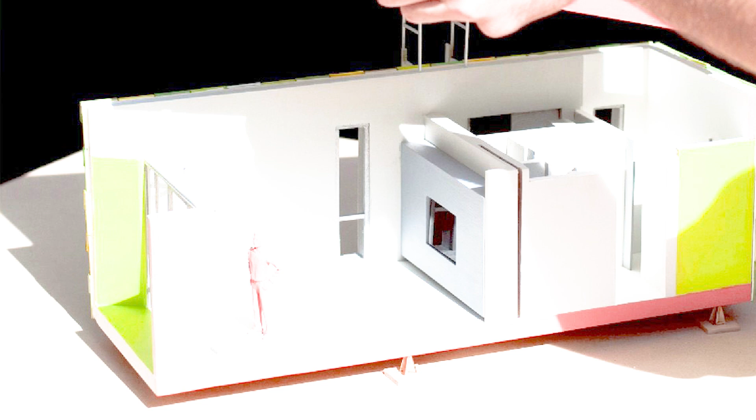Okay, let's make a start while the next slide is loading.

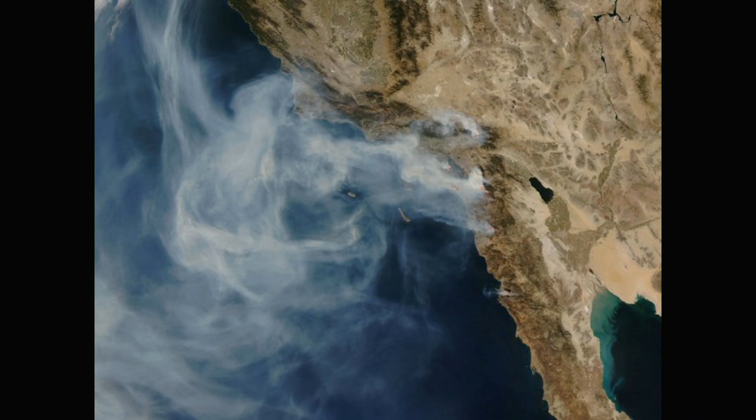And we also asked, since the project is located in Southern California, what are some of the key attributes that characterize the city? Horizontality, grid formations and topographical change, variable densities, microclimates, cultural multiplicity, and alternate living scenarios or dwelling scenarios are things that we looked at. One of the mandates of the competition is to design a prototypical house for the region and climate and environment that your university is located in. So if your university was in Indiana, you would be designing for that environment, that climatic zone.

The year we participated was unique because the site wasn't in Washington, D.C., which is where it had been in previous years. It was in Orange County, and of the 20 schools that were participating, we were the closest one. There was a school from Austria, there was a school from the Czech Republic, and although it's a challenging competition, I have to say their challenge was greater because they had to have the house in a shipping container on a ship to the U.S. while we were still building the first prototype on campus. So hats off to them, and both of those teams, I have to say, did a really terrific job.

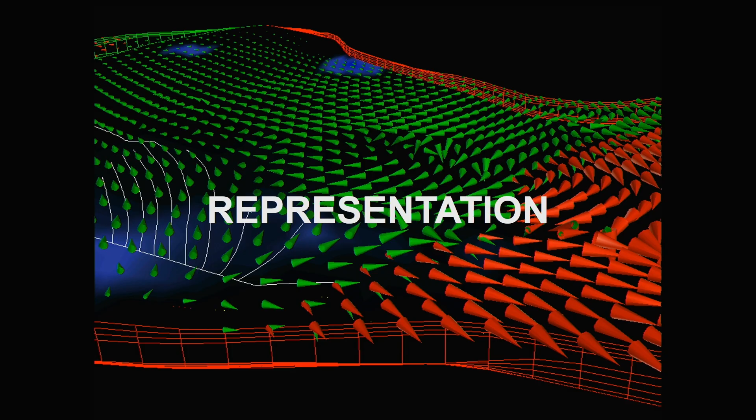Mapping things that were changing. So again, like the satellite photos that I showed earlier, part of our research involves trying to see unseen or immaterial phenomena and forces, particularly as it pertains to the changing state of things like air, light, space, fluids, etc. So fluid dynamics, mixing and remixing, vector fields and flow patterns, fluid dynamics and vectors that describe forces, turbulent flow visualization, in this case smoke and wind, diagram of estimated energy flows, and a map describing another site,

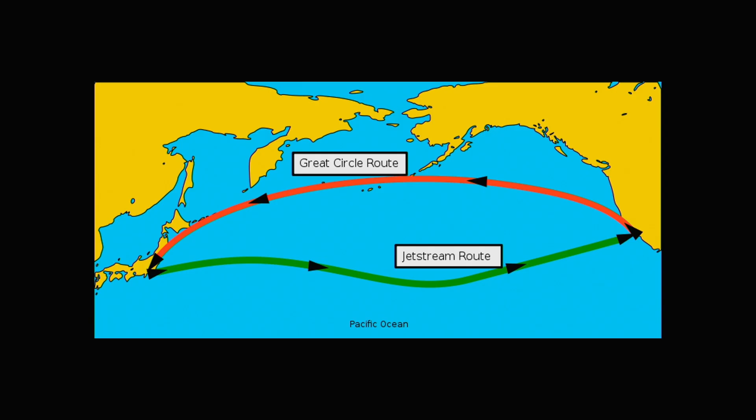the Pacific Rim, which more specifically shows two different flight paths. You'll note that they are different, one taking advantage of the geographical distance, while the other uses the path of the jet stream or tailwinds to map a route.

We became interested in our inquiry in subtraction. That must surprise some of the USC students, huh? And things, porosity, or stuff with holes. So we looked at natural organisms and inorganic objects to understand how they work or perform. This is a sea sponge, a plan of an automobile intake manifold,

two untitled sculptures by Tom Friedman, one on the left additive, with kind of equivalent amount of figure and void space, and the other subtractive and entropic, a school chair that he took and drilled holes into to the point of near collapsing. And finally, a land art sculpture by the artist Michael Heizer, which is a continuous frame of reference for work that

I'm involved with, Double Negative, and two images, one the aerial showing the first negative, which is the natural gorge at Mormon Mesa, and then the second negative, which you see depicted from the point of view that spans the gorge, which is a line that he created through dynamiting and bulldozing the earth to create a line that spans the gorge that is the length of the Empire State Building.

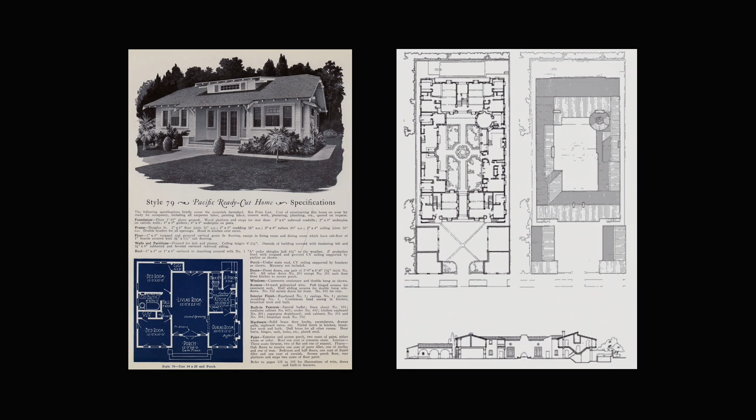Architectural precedents included vernacular housing typologies in Southern California, such as craftsman bungalows and courtyard housing. In both instances, we saw an organization of rooms or zones arranged around a central social space that can be used in different ways. In the bungalow, depicted here on the left, we learned about the value of porches as shading devices and intermediate spaces or gray zones between interior and exterior spaces.

USC professor Ralph Knowles's research on solar envelopes and form finding, where he started with simple primitives and then faceted, beveled, chamfered them in a manner that responds to the movement of the sun. And then another example that we see in Japan with their solar codes.

And one of the reasons why so many buildings in Tokyo have these unique chamfers or bevels at the top, which are not aesthetic conceits, but rather driven by code requirements for how many hours of available sunlight you're stipulated to make sure your neighbor receives. So the form, which is a determinant of massing, is driven by performance, hence the title, Performance in Form.

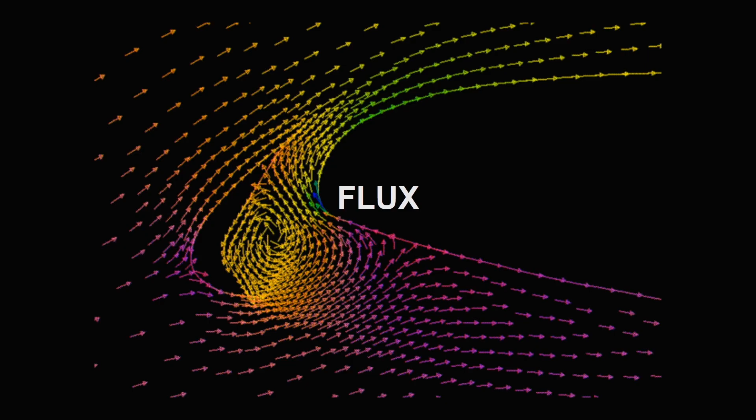The second pedagogical principle that became our mantra is that architecture is a mode of critical spatial inquiry and practice. And this slide just illustrates some spatial concepts of the double negative and how volumes could be nested, tunneled, intersecting with one another, almost like a manifold, an idea that we would return to in the design process, in the conceptual design phase.

So our research and observations led to a spatial concept that celebrates the various forms of change that are such a vital part of our culture, which led to the following statement. Our world is changing fast. Change, in fact, is ubiquitous in our contemporary experience. The different changes, climate, social, technological, cultural, and change more specifically to California and Southern California in the formation of the nuclear family are prevalent.

So we were trying to look at alternate living scenarios that reflected contemporary lifestyles, but also as part of a global condition which you see, I know in Tokyo for sure, but other cities that define life in the 21st century. Some notes on process.

So we used this research as a point of departure, beginning with a simple yet efficient primitive or mass that measures approximately 10 by 10 meters. And then subtracted portions from it to channel air and light into the house. Again, the idea that I just showed of porosity and flow is central to any passive energy design premise. So from the beginning, we wanted to make it a focus on the massing of the house and part of the performance criteria.

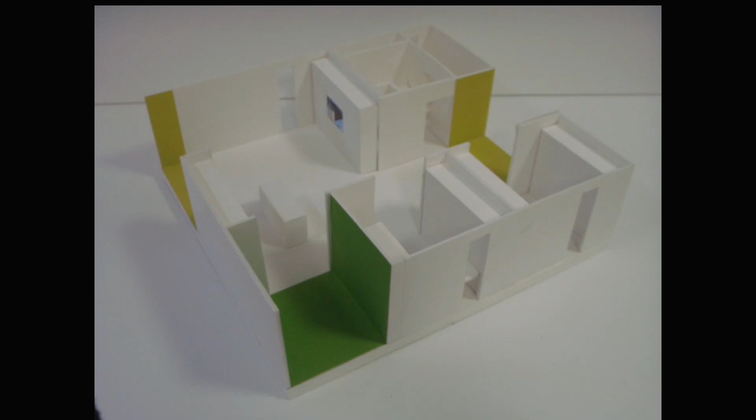Another model that's beginning to look at the relationship between interior and exterior zones. We're also starting to think about how we construct and transport this to Orange County. And so you have 3 linear modules that fit on flatbed trailers, which you'll see a bit later. Again, intersecting voids or double negatives, framing models to study the system of construction and prefabricated assembly.

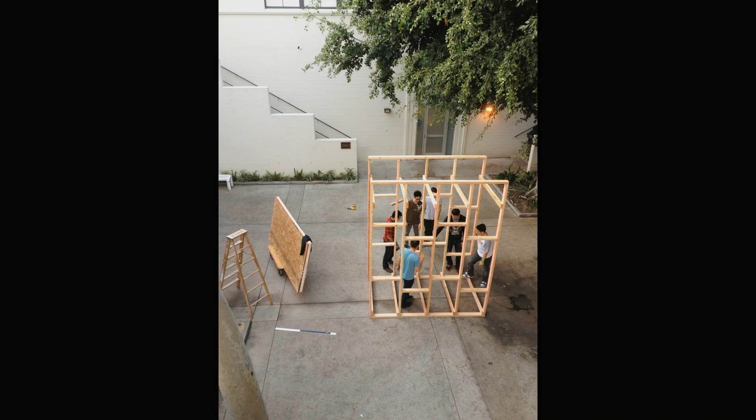So again, a reminder that we're constructing the house on campus and having to transport it to Orange County and reassemble it in 8 days. So issues such as how much each module weighs, how they come apart and go back together, are very important. Studies of perforated envelope systems, using various software to generate variable patterns. It's another more figurative pattern. Full-scale mock-up under construction in the USC courtyard.

And then design teams: we had probably anywhere from 20 to 30 students working on this. So we had different teams organized, so we were really in a kind of privileged position to explore visualization and modeling tools and do as much experimentation as we could afford to do.

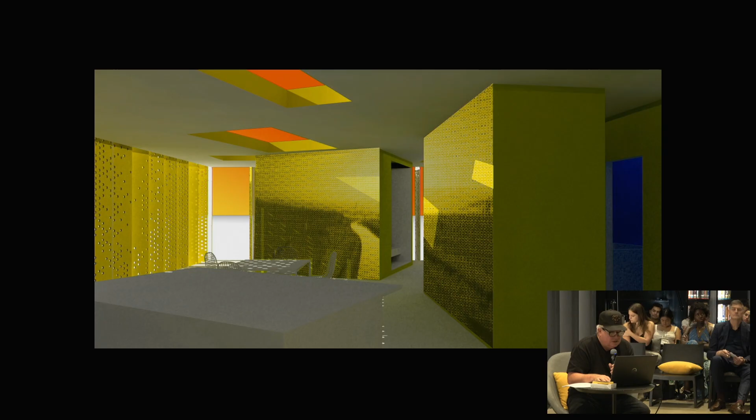So this is a prototype with the operable shutters that are perforated and respond to different solar orientation. Interior views, trying to model or show some of the effects. Studies involving the idea of chromatic space, so looking at tinted skylights. The shutter envelope system permits the homeowner to control the amount of privacy, breezes, and light. So instead of highly automated systems, we wanted to look at things that were lower tech and easy for users to control.

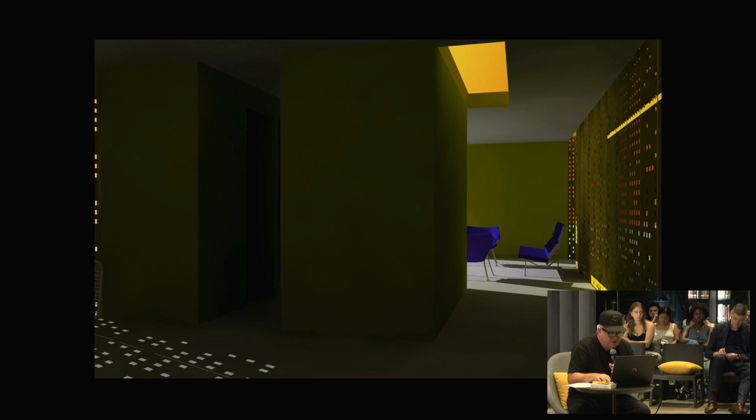Another view showing the relationship between interior surfaces and exterior envelope systems, pixelation, perforation. And we were using, this was a little while ago, software, Photoshop and Grasshopper, to generate some of the imagery and do the fabrication. Light and dark spaces. It's another alternate model, riffing off of Mies' 50 by 50 house. We did the 27 by 27 house, which I still like, even though we didn't go with that one.

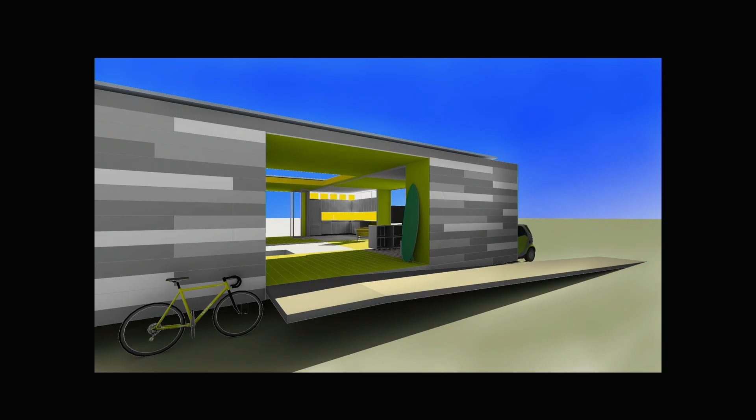Loft, inhabitable poche, including the service cores and storage walls flanking two sides. And then this idea of the house as a manifold, a more porous and open volume, in this case clad with reclaimed lumber. Louvers on the west-facing elevation, oversized openings to connect with the outdoors. Hopefully a critical take on the bungalow and courtyard house.

And then later, as we start thinking about it, even some of the case study houses, where we tried to put systems in place that didn't mediate as much between inside and outside, but allowed you to literally slide open doors that would allow the inside in, and also the solar chimney here for venting hot air and admitting light. We spent a lot of time on interiors, designing the project from the interior, looking at the courtyard or the flux space. Also indirect lighting mixed with natural lighting to produce atmospheres.

Yeah, so here's an example of indirect LED light sources. Tracking sunlight, various times a day, nighttime. So one of the contests that the Solar Decathlon had is that you had to show a movie at night.

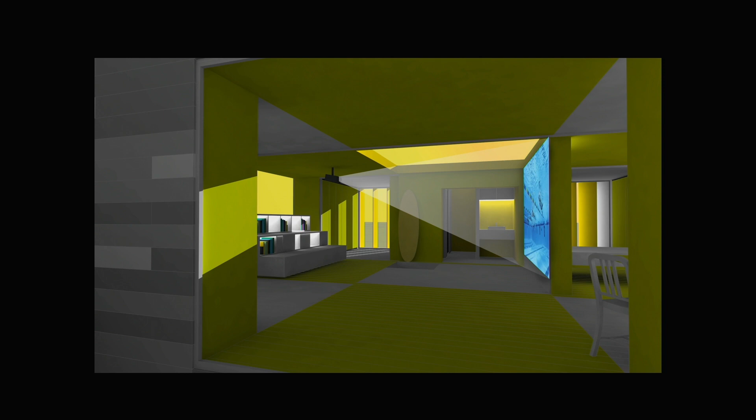I mean, so the competition, a large part of it has to do with how the house performs. So you have to operate the house, and you either gain points or lose points based on the performance. So having a home control system was an important part of one of the competitions. This is a simulation of movie night.

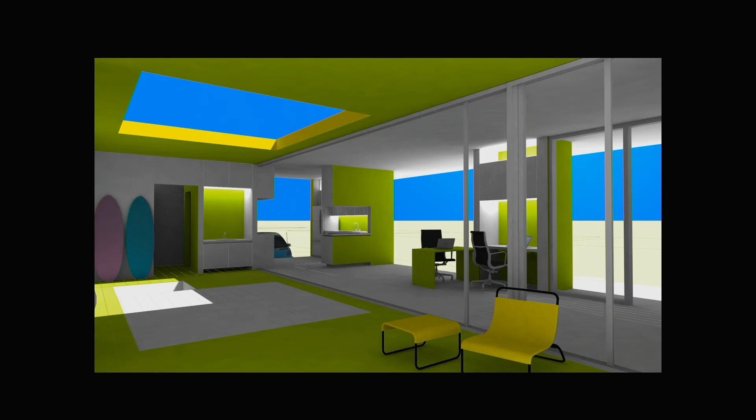This we're studying the placement of various sliding partitions, transparent and translucent, look at other ways of opening and closing spaces. Yeah, this is when I think we were starting to think some about the case study houses, and this is a kind of case study 2.0 project. The ramp is part, because the house has to be ADA accessible, so the ramp is part of an oversized landing and an extended porch space.

View of the PV array from above and three volumes, and then this roof that creates a carport. So those were some of the versions that we generated. However, at some point, you have to commit to an idea and start the process of developing the design and producing the construction documents.

And this, unfortunately, I don't have any shots of that, but we had, I think, in the final set, just in part because of the DOE requirements, over 100 sheets, which is crazy given the fact that some of the case study houses were built with 4 sheets or 6 sheets, the famous case study houses in Southern California.

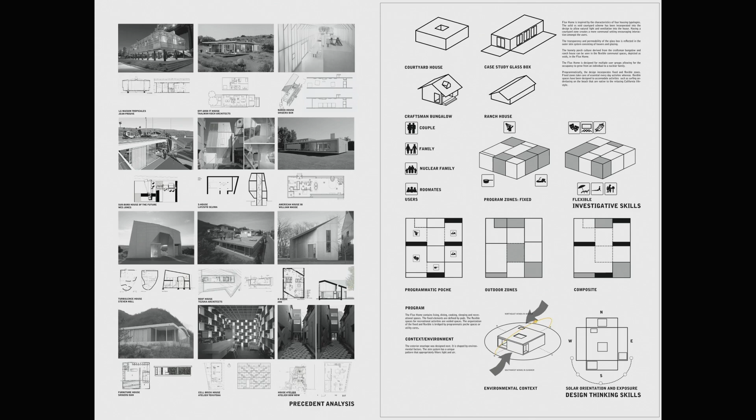So we're looking at a range of different precedents architecturally, diagramming the precedents and how it leads to our proposal, site plan and some generative and analytical diagrams, the whole issue of affordability, and so we were working with a cost estimator, and making decisions that are informed by a budget for sure.

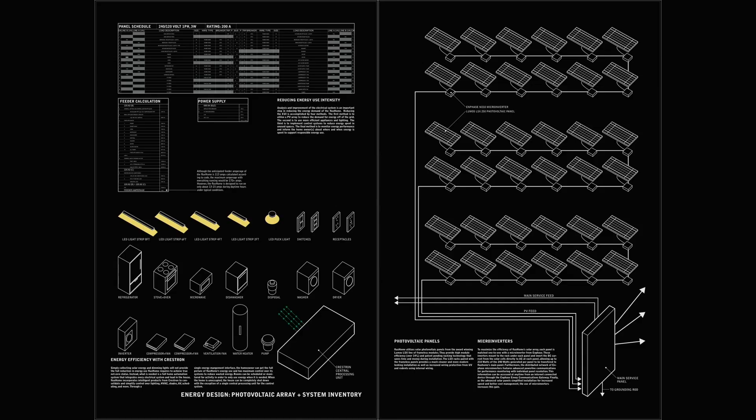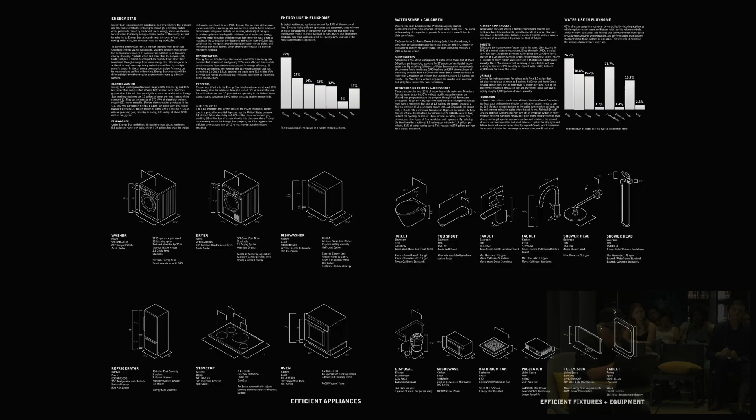Energy analysis, understanding our environmental context, research and design options for energy systems, natural and artificial lighting strategies, options for different mechanical systems, passive design strategies to try and achieve the net zero energy balance, energy efficient appliances and fixtures. So we had to quantify the usage of each appliance.

And now we're sort of honing in more on the design that's going to be built after going through some of those different criteria. We even had to operate a Facebook page, which we ended up with the most likes. That was one we won.

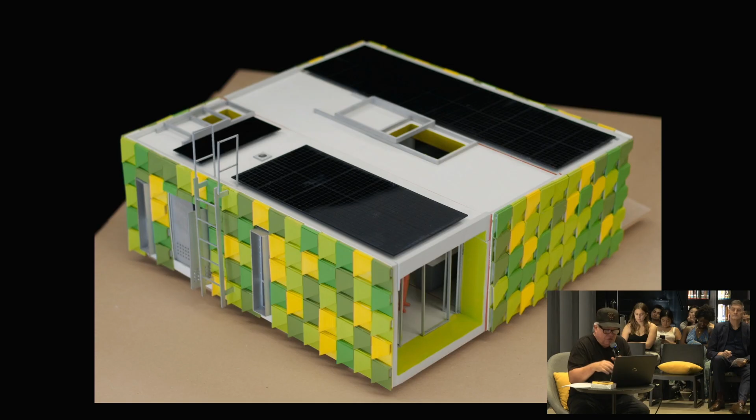We're starting to look at rain screen facades. This is an example of a pixelated, or what we call the pixelated rain screen envelope. And then a section model showing 2 of the 3 prefabricated modules. The south-facing porch with the entertainment center and the bathroom core.

And then we built models at all different scales because this is the first time the students were building a full-scale project. And so we did this one, I think, which was maybe 3 inches equals a foot of one of the modules, where we even 3D printed all the ductwork, the toilets, all the mechanical systems, everything. You can see a hot water heater there.

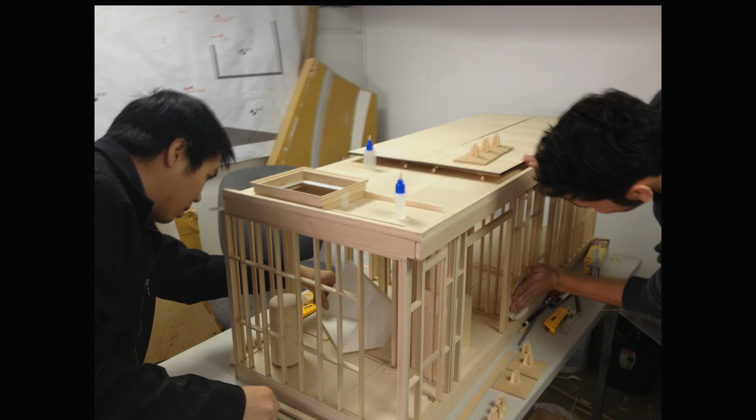Another perforated rain screen option, and then the booklet. So every team had to produce a project booklet. And if you look closely, you'll know we're always testing out different envelope systems. So the integration of active, passive systems, the engineering, the relationship between the architecture and engineering, and how this is an integrated system.

And then the amenities in various systems, the final floor plan, our foray into mass customization and transformability. So we had a custom-made living room sofa that could be configured in, I think, 32 different ways. And I could show 20 slides just on this darn sofa. But we used different fabrics, different patterns, again, to try and reflect, I think, some of the culture, the multiplicity of cultures that are part of Los Angeles.

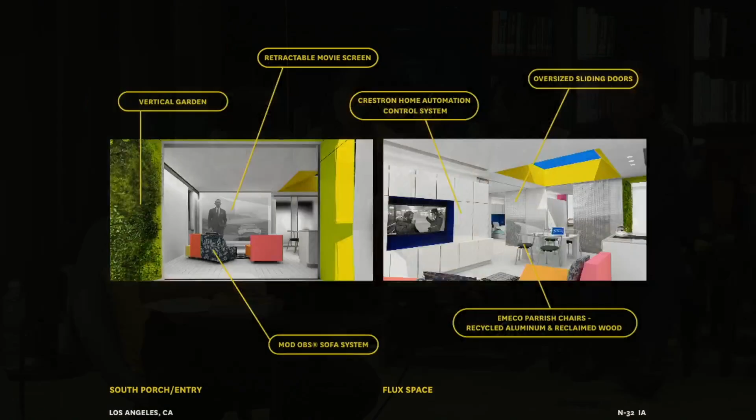Again, the contest stipulated that you had to be very precise in pointing out the amenities, the energy-saving elements, and what was innovative. So it's easy to say a project's innovative, right? But when you have to point to it and kind of defend it, that's something else, and something I think we all learned a great deal from.

So oversized sliding doors, the mass customized furniture system, furniture that was recycled or reclaimed wood, so there's a sustainability narrative, east-facing breakfast porch, oversized folding and sliding window walls, folding so that the entire opening could be open to the outdoors as opposed to a sliding situation where you're only going to get 50% or 33% or 25%. We really were trying to hang on to that modernist idea of having an opening that is truly an opening to the outdoors.

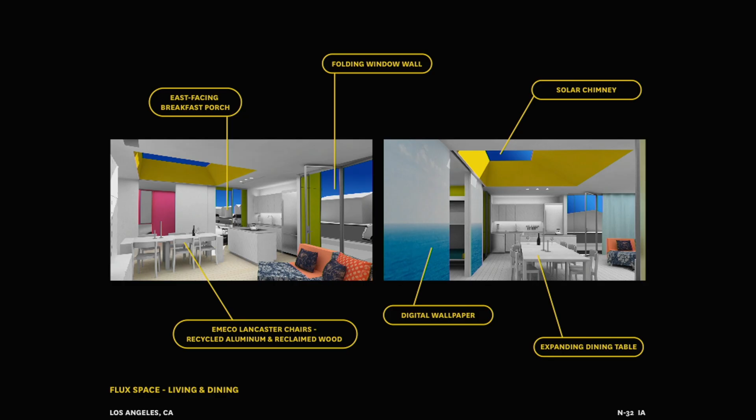The open-air shower view from above and recycled glass mosaic tile. And then the sliding glass pocket door for the breezeway that was translucent. Small bit of Hokusai and Eames in the foreground and background, actually, which is our nod to Charles and Ray Eames, who worked in Southern California and of course were the authors and architects of the famous Eames case study house.

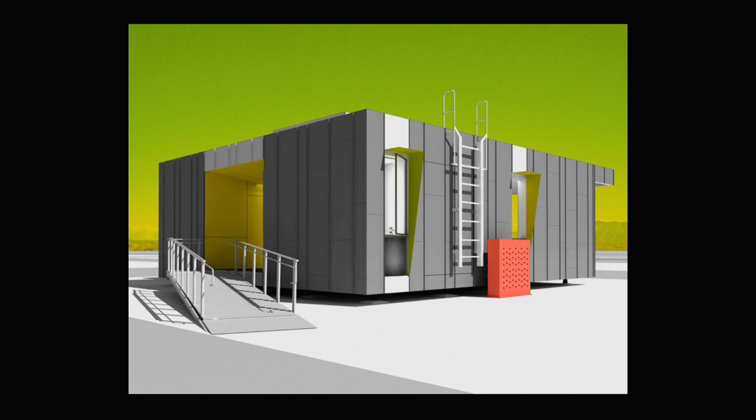The aluminum and galvalume cladding, which didn't cost as much as all of the pixelated rain screen facade systems that we designed and even mocked up in some instances. The breakfast porch, so bifold shading system, LED lighting, bamboo floors, folding bunk beds. Because the bedrooms are quite small, we wanted to keep them compact so that people would have to spend time in the communal, multi-purpose flux spaces. And one way we deal with that is furniture that would fold up, but oversized floor-to-ceiling heights, and then doors that slide open to open the entire space.

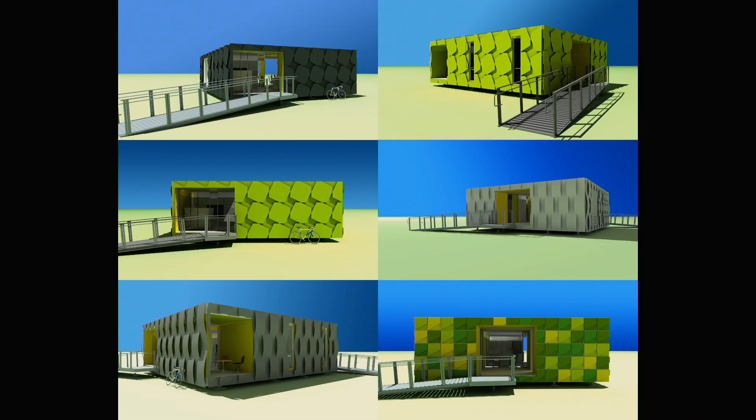Some shots of context. It's the view looking into the living room from the front porch. East porch at dusk. Yeah, more envelope studies. And then at this point, we started construction on the lawn adjacent to the School of Architecture. So for the USC students, this is the former South Lawn next to the architecture building where the Iovine and Young Academy currently is. And so the grid of seismic piers for the prefabricated modules, steel frame getting craned into the site, lifted and bolted in place. This all happened in a matter of hours instead of days.

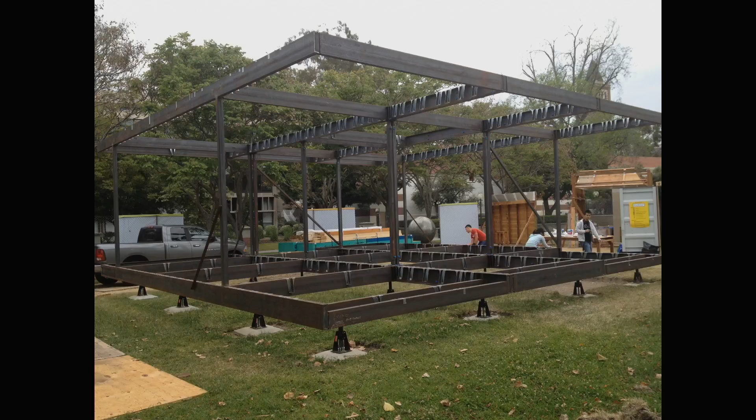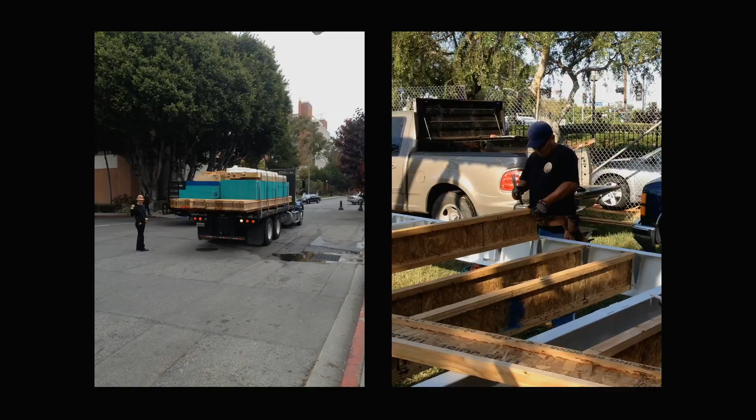Joist hangers getting welded into place, the steel frame, team members priming the steel frame, and then, of course, one of my favorite shots, our Mies moment, recalling something that Frank Gehry famously said, buildings usually look best when they're incomplete. And, you know, Farnsworth at night, yeah. It's again, nice shot on the south lawn. Lumber getting delivered to the site, and floor and roof joists in place. Still pretty Miesian. And more welding. Roof getting sheathed and the solar chimney getting boxed out.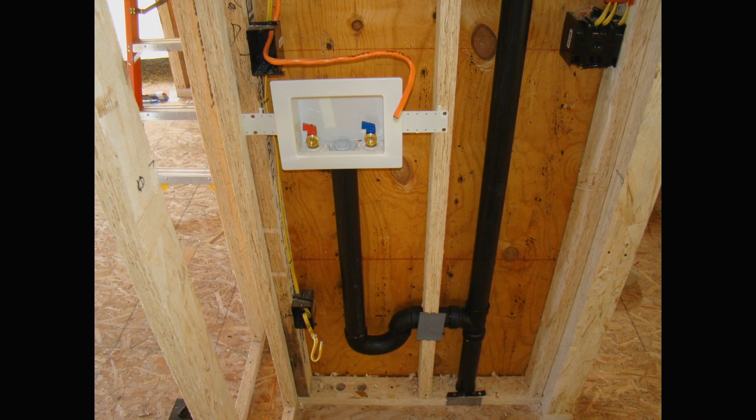Roofing substrate getting applied. PVC roofing material with plumbing vents and the cylinder for the sun tunnel skylight, plumbing and wiring, a lot of which the students learned how to do with the guidance of an electrical contractor. So a number of the architecture students came away with an ability to do the plumbing and some of the wiring for the house, and also how to wire a PV system. The in-wall tank system I was just talking about this afternoon. And then setting the rails for the photovoltaics, roof with vents, sun tunnel, skylight.

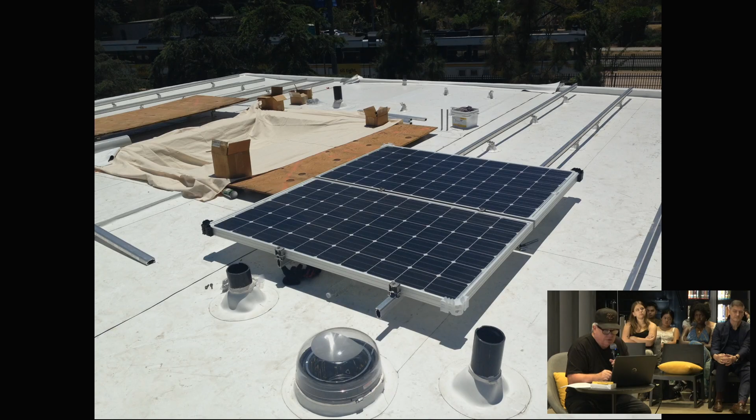Extensive use of 3 types of lighting: top lighting, side lighting, and even some reflected up lighting, which I'll show you in the completed work. This is kind of an important moment. The first photovoltaic panels and sun tunnel skylight are set. Duct work, and then fast forward to the Great Park in Orange County.

So this is student members of the installation team arriving. We even had to design the T-shirts. That's part of the competition, the graphics part of the competition, that each team had to design a logo, a slogan, and T-shirt, and all that other stuff I showed. This is our advanced team. The first orientation meeting in one of the hangars, an early morning site walk on what was a blazing day on the tarmac, I will tell you. Strategizing. Oh, this is Tyler's pickup truck where we were hauling stuff in pickup trucks and U-Hauls. This is some of the equipment arriving.

The cranes. And so this is how most of the schools did it; I think there were only 2 of us that took a different approach, which used forklifts. And we did research on this. And if you were in Los Angeles at the time, there was a famous news item showing the space shuttle being moved through the streets of Los Angeles in the middle of the night. And so we found the firm that did that moving, and they used forklifts.

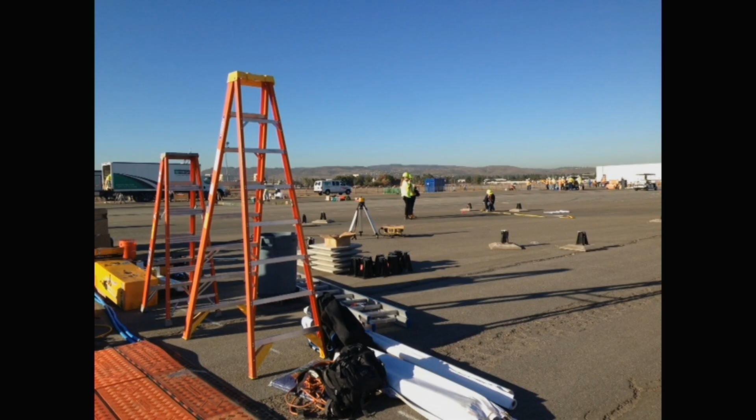So we hired them, and they were fast, much faster than the cranes. So we're setting the seismic piers. That one's for E. Let's see. Verifying our dimensions with our contractor, John Cordick, shout out.

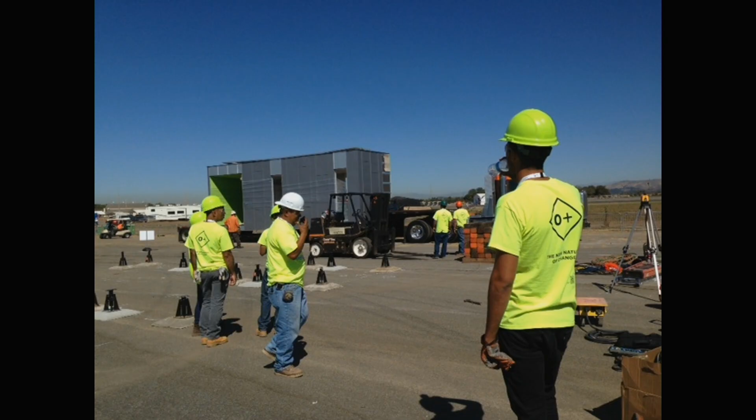The first module arrives. Instead of a crane, we decided to use the forklift. Here they're getting lifted into place. And the first one's set. This is not a good OSHA moment, but the alignment was pretty tricky. And yeah, okay. I won't say anything more about that.

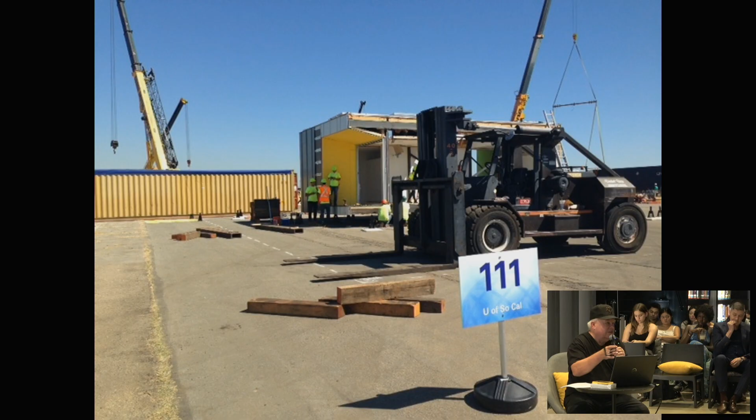Second module getting set in place. The middle module. And interior finishing starts. You can see the kitchen cabinets and the galley kitchen with the refrigerator. So we moved a lot of things already installed just to make the installation quicker.

Aerial view to give you a sense of the scope of the endeavor. This is an image of all the houses under construction. And again, bear in mind that we only had 1 week to reassemble them and make them operational. This is the third and final module arriving, checking alignments again.

And this, if you look closely, you'll note that the back tires are off the ground. And what we, including the forklift operator, just never got as part of the information, is that each module weighed different. And this one was by far the heaviest because all the energy equipment was in here. So that's okay. They just put counterweights on the back, and we were good to go.

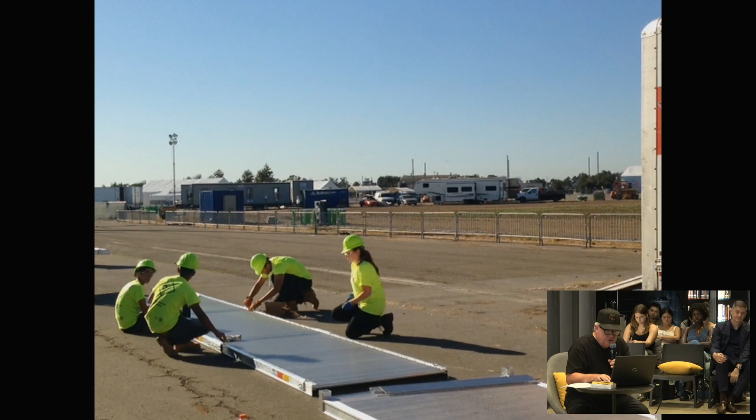Student project manager getting interviewed by the local TV crew, students assembling the prefab aluminum ramps. This is a north ramp, which is getting connected to the house. Site meeting with the construction team. Lifting PVs into place, patching interior walls, cutting sheetrock, and the interior view of the splayed solar chimney for air and light.

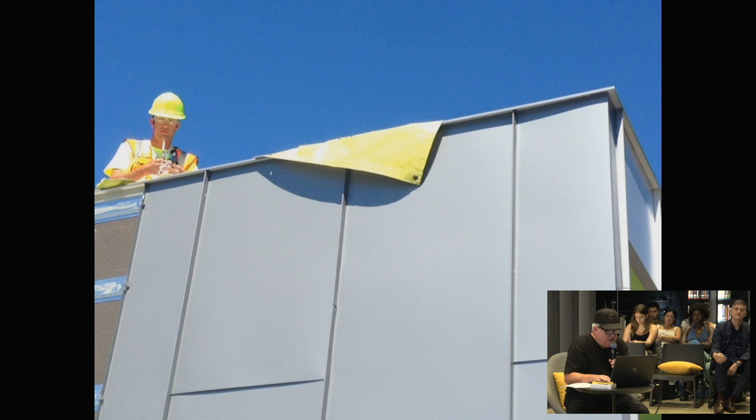Tyler, one of the team members, wrestling with a storage tank, placing the USC banner. And so this is the house before the folding glass doors are installed in the south porch. Completed house with landscape element, palo verde tree there. South and east porches with living green walls, detailed aluminum and galvalume envelope and oversized casement windows. East porch with vertical herb garden, and clearly the wrong chairs for this project, but the chairs were lent to us, so we went with them.

And a view of the interior with open plan living zone and kitchen zone, part of the sofa and the flexible flux space. The retractable skylight in a partially open position over the solar chimney for heat exhaust and natural ventilation, and obviously for a lot of natural light. And then the view looking towards the built entertainment center, recessed coves, indirect lighting, living room and custom sofa.

Another nod to Eames in the foreground, a view of the solar chimney, the oversized sliding bedroom doors that I mentioned earlier, and then this foldable bunk bed which folds up into the wall. The open-air bathroom and shower with a two-person soak tub.

And finally, not the whole team, in a 2-year period, there were over 100 undergrad and graduate students that worked on this project. But a big word of acknowledgement and appreciation to the team that worked on the project, along with my tireless USC colleague, architect Alice Kim. And the amount that we learned was extraordinary. Thank you.

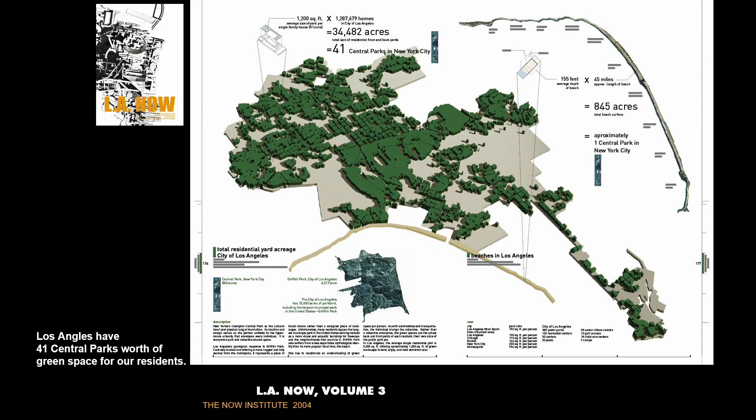However, if we collect and amortize all the backyards of every single family residence, we actually have 41 central parks in terms of acreage. Or conversely, if I were to measure the spatial footprint of our beaches, that is actually equivalent to about 845 acres, or our one Central Park in New York. So there are always these spatial equivalencies that we make.

And here, this is back in 2006 when a lot of the job market went out to China for fabrication and production, and we were left with a lot of warehouses. So what was the impact of that in LA? So we began to hold hands with the government.

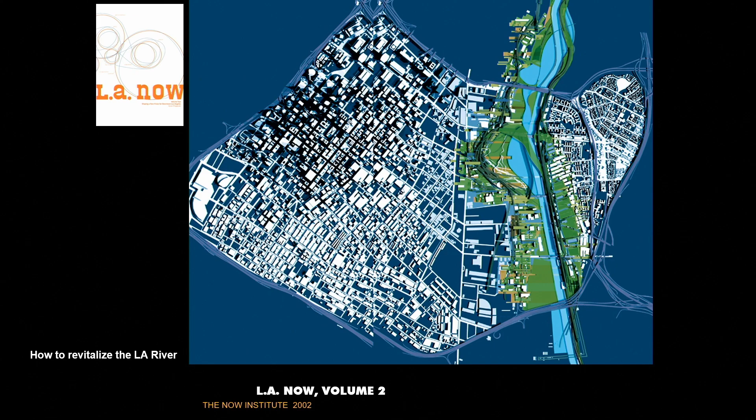And the urban planning department of LA would say, you know what, I always wanted to envision this part of the city to become this, or that part of the city to become that, but we have no money or the funding to actually help us envision or spatialize or create metrics. And so we began to work with them to create these spatial physical planning metrics. And then at the same time, we would go around and document culture.

So there was always this collaboration between research that came out from spatial surveying and spatial research, plus the full understanding and the full cultural empathy of the diversity of different neighborhoods and different cultural groups. So I'm going to give you project by project as an example. The first one was New Orleans. And we call these projects, we have a city name, and we attach the word now.

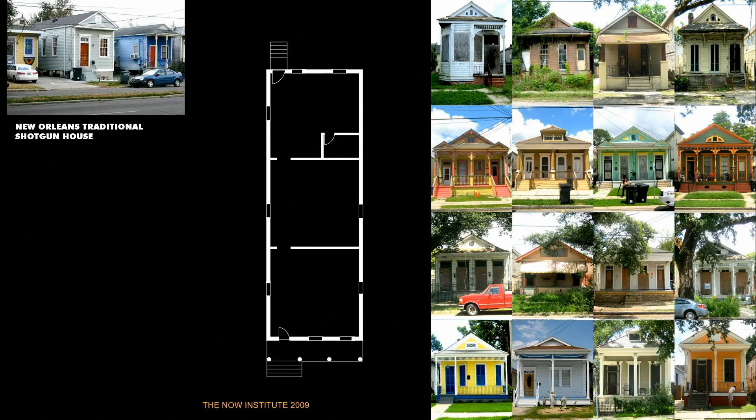So what we ended up doing was making a chassis, like a car chassis, that would allow those metrics to actually be satisfied. On top of this chassis, anybody can put whatever house design they want. That's their culture, that's their own identity as a family, but the basis is this chassis.

And so with this chassis and with my students, we ended up creating this high-performance floating hull that we constructed with a high-performance floating foam that allowed it to be buoyant with all our systems in it. And this is being built in Westwood. And we shipped it across Texas, and we drove it all the way to New Orleans, and we finally built it.

So now there's a lovely old couple that's living here. The roof is folded to completely collect rainwater and hurricane water when there's a storm. When it does flood, the house will float. It is actually anchored, so it only goes up and down. It's not like a boat where you could steer it to some other neighborhood, but it does allow you to stay buoyant and safe for 3 weeks.

So moving forward, President Obama has this thing called the Grand Challenges. The Grand Challenges is where he identifies these huge problems facing all of humanity and assigns 2 of them to every American research university, like Yale, University of Chicago, and UCLA. UCLA got dementia, mental health, and urban sustainability. So we took on the lead in urban sustainability.

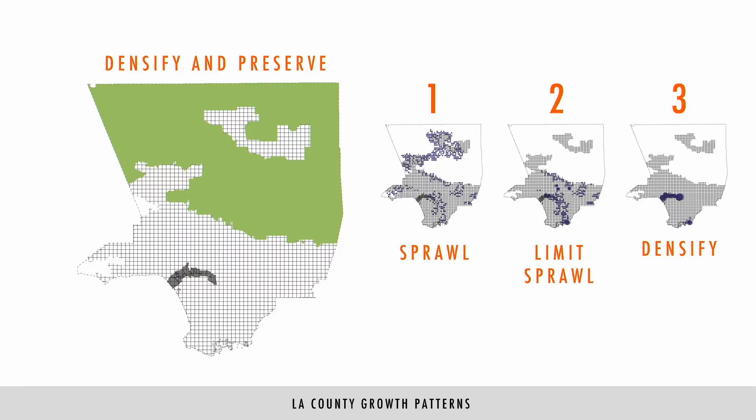And the first thing we ended up doing was creating a 3-dimensional live intelligent model spanning from the beach, which is on your left-hand side, all the way to where it terminates in downtown. Each volume, each polygon, each geometry is a live model that is cross-referenced with every metric, how expensive it is, when it was built, how much energy it's actually producing, and so forth. And this became like a living model. And this was connected with my friends over at Esri.

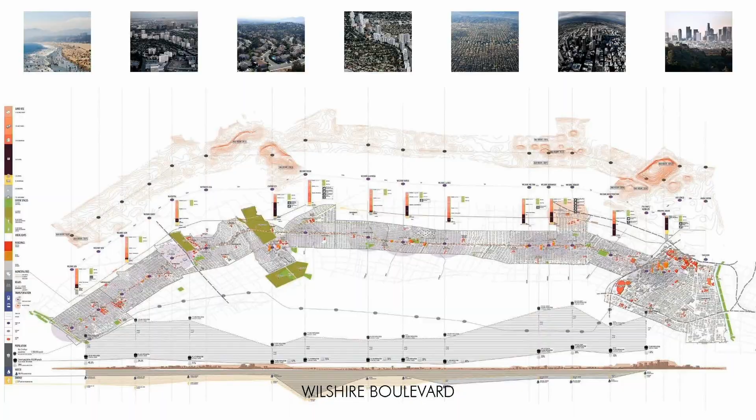And then after this, there is a central subway line that was being built. I think it's going to almost be done by early next year, which is the Expo line. And so we're looking at different population strategies, and Tom decided to do this. So this is nothing original. For anybody here who does urban design, this is the classic TOD, transit-oriented development. And we decided to do a TOD across these major stations, Santa Monica, Century City, Los Angeles County Museum of Art, Koreatown, and downtown.

The one thing that we did want to do is to use each one of the TODs as a different organ, like in an animal. Like if this was a snake or a dragon or whatever metaphor you want to use, is one the lung, is the other one the stomach, is the other one the brain, is one the muscle? How can they start co-depending upon each other to create this larger system as a forest as opposed to a tree?

When you look at a building and say, okay, that building is sustainable, that's victory number one. But that's like understanding the tree. Now we're getting to a much more complex ecosystem where we have to understand the city literally, and I apologize for the cliche, like an old-fashioned forest. You got the big trees, the small flowers, you got the happy bunny rabbits, and we're all trying to live together, right? And so we were trying to do these metrics, just like Gary.

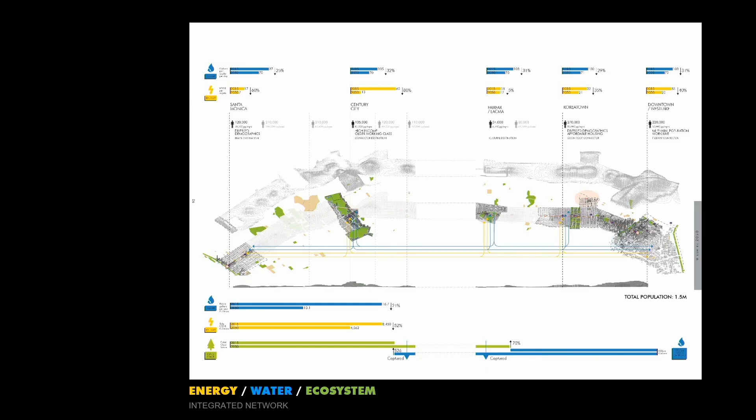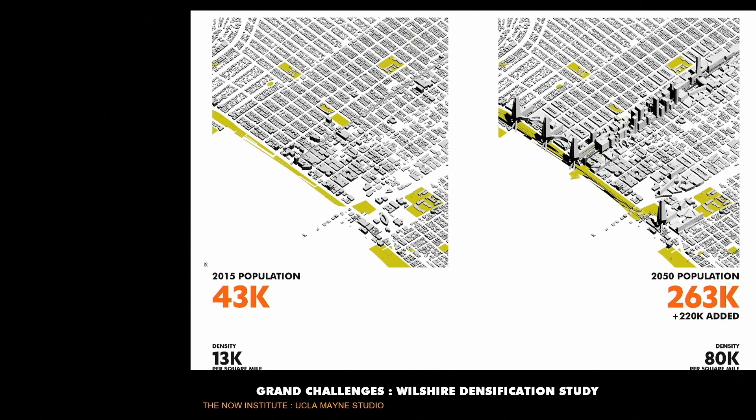So we were looking at different metrics of open space collected with stormwater, and we're looking at all the different metrics. We started to envision what all these little stops could be. And then we started to do before and after. So Santa Monica, 43,000. In the year 2050, can we add almost 220,000 people? Can we actually spatialize it like that in a high density corridor?

And the design here is the design of just massing, right? The massing is about quantitative sizing. So same thing, before and after. This is for those of you from LA. This is near UCLA and the Country Club. This is what if in the future the golf courses are now converted to public parks?

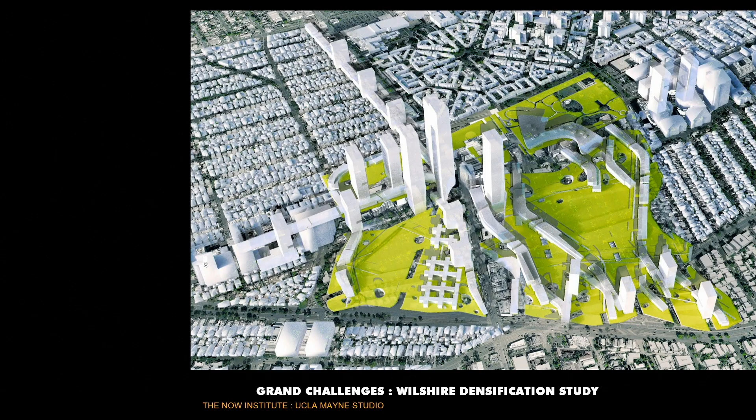This is like Los Angeles County Museum of Art, LACMA, with a Peter Zumthor Museum there. What if we make this into a larger high-density sponge city? This is in Koreatown. What if we make this now into a rooftop urban agriculture? And then the focus of these type of studies is at a certain point there is going to be, oh, no way, we're not going to do that, a breaking point.

And this was a breaking point where the numbers show something so ridiculous. This is not where you want to go. So this ended up being like this closed system. But the reason I'm showing you this and the thesis of this lecture is because we did this for about 2 years, this allowed us to do the next project I'm about to show you, because it completely influenced this, which is NEOM, the line.

Okay? So I don't know how many of you are familiar with this project. This is a project out in Saudi Arabia, led by the new Crown Prince, Mohammed bin Salman. He is 39 years old, or I think maybe he's actually 40 years old now. He was told that in about 50 years, Saudi Arabia will not have enough oil, and that condition is called peak oil. 50 years, that's 2 generations. So for him, we have to pivot into some sort of other new economic strategy.

And so he created what they call giga projects. Giga projects are different urban projects with a different economic strategy in mind. And the one that is the most advanced in terms of technology or attracting tech startups was NEOM. NEOM is the size of Belgium or the size of Massachusetts. And in 2019, we were called in halfway through a competition that was ongoing.

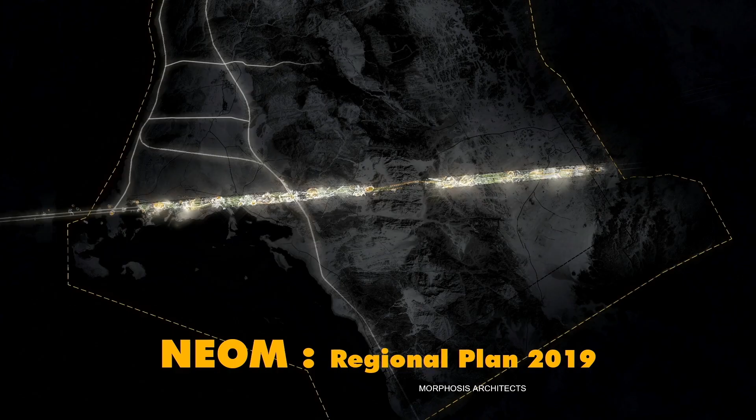So SOM, Stefano Boeri, there's all these other guys that started a competition in November, and it was going to end around April. And we were called in with Zaha Hadid in February, halfway through the competition. And they said, if you want to do this, I'm going to invite you, but you're not getting a break in terms of what the final deliverables are. It's the same deliverables. I was like, oh, sure, why not? I mean, when's the next time you're going to get a chance to play in this ground?

But there is something that Tom and I do when we're invited to a competition that we feel we're not going to win, which is we might be able to get second or third place. And this is the same line I told you guys when I was talking about the Taipei competition. We're just going to put all our wish list into this competition, and if we get second or third, when they announce the winner, maybe they'll say, oh, the second place were these guys called Morphosis, they were thinking about these crazy ideas. It's too bad they didn't win it.

But we were thinking we could actually piggyback on whoever the first place was, and maybe somebody can hear our ideas. So these were the 4. We're going to take the size of Belgium and only develop 4% of the land. Guess where that came from? That came from the Wilshire Corridor project at UCLA, where we say we're only going to develop 4% of the land. That's where it came from, because we had no time. We had no time, so we are using our UCLA 2 years worth of research to do this.

Car-free, 5-minute walkable communities. That's exactly what we have for Wilshire, even though that was in LA. Anywhere you're going to go, 25 minutes. Guess what? That's from Santa Monica all the way to downtown LA. And then if you're going to build anything, it's not going to be neutral. It's going to be net positive, which at this point the technology really wasn't there.

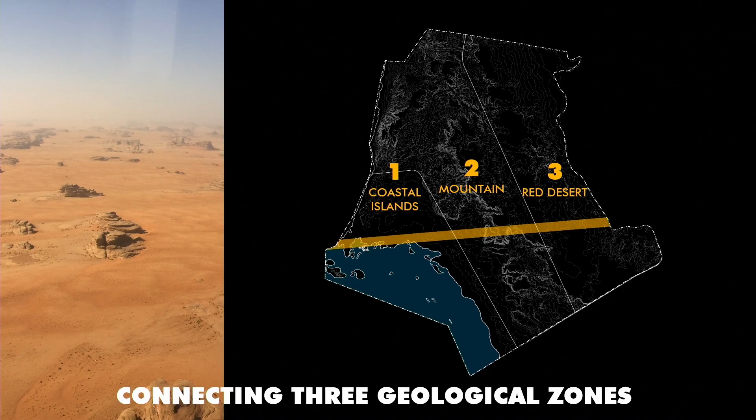So we recognized that there were 3 different zones. And these are the actual photographs. This is the coastal islands. This is actually Neom. And then this is literally the mountain that we're going through. And this is the red desert. For those of you who ever saw the movie Dune, this was filmed here. Or the last 3 Star Wars movies, this was all filmed here.

And we're like, you know what? I know every firm is going to do this because it's such a common sense thing to do, but we're going to do this. So we're going to stitch it. We stitched it, connected it. That's the 4%. We're going to leave 96%. I bet basically the head of OPEC is going to go crazy on this, right? And then we're going to say we're going to have 15 communities of an average of 80,000 people up and down the spine.

And the big thing to understand is this. At this time, globally, every urban planner is using 2 square kilometers as the basic template to understand walkability. Okay, this is not my idea. This was a global consensus. And so 2 square kilometers, if you square root that, that's 1.4 kilometers. Each one of these maps is an actual true scale capture of what 1.4 kilometers captures you.

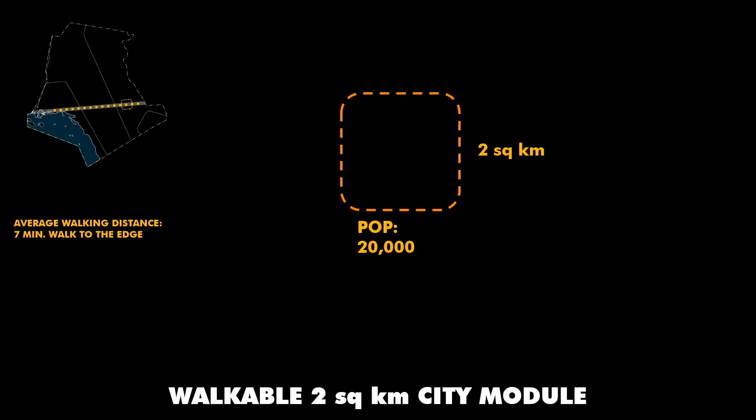So for those of you who are familiar with London or Singapore or Seoul, you know the amount of area I just captured. There's a lot of activities there. There's a lot of culture. There's a lot of metrics there, right? That's what we're capturing. And so we decided to take one, and then we began to understand this as from the centroid walking out to the edge would be around 700 meters. And if we multiply that, that would actually be one of these communities.

The center spine at this time was this new advanced Shinkansen bullet train from Japan that they were just announcing, a maglev Shinkansen going at 650 kilometers per hour. I saw that on YouTube. It's like, that's going to be my spine. So this was it. And there's nothing original about this.

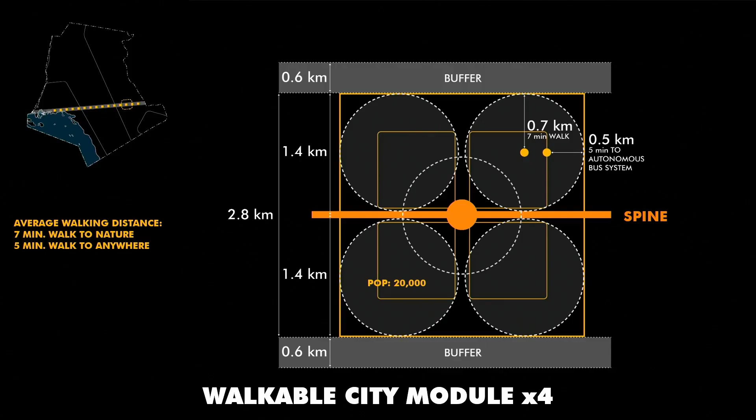All we were inspired by were big American universities, UCLA, University of Michigan, because if you look at big universities in America especially, you have an entire walking ecosystem, right, of students going to classrooms, eating, with minimal cars. The cars are just basically there for servicing. So we did this and we laid it out. And of course the narrative was pretty simple. You could go from Milan to Jeddah and Paris all within one line. And so this was our first design.

So it was this complex, very informal collection and cluster of urbanity, going up and down a line. This was our first design for the first 1 year. So if you look up The Line right now, you're going to see something else, right? It's this crazy mirror building. That is not what the original Line is. Okay, the original Line was this.

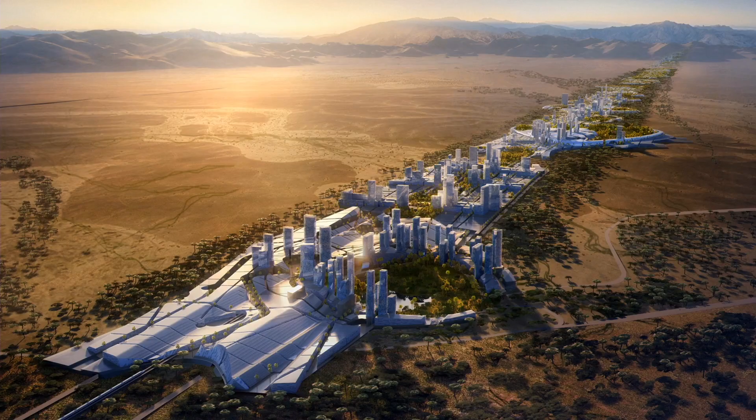We secretly wanted this to go forward so we could bring on like 200 of the world's best designers and urban planners, and everybody would come in and it'd be just one massive design party, and everybody would be riffing off each other, and we would actually have this collective city.

This was the final design. So after 1 year, and all this, in case you're wondering, was done with my graduate students. So this was a complete graduate student, a complete academic proposal. It was conceptually rich, and by some miracle, this is how we ended up getting there. So after 1 year, the Crown Prince told me, Professor Yi, thank you very much for what you've offered, but I find it a little bit conservative.

It's a little bit normal, isn't it? So he says, I had a vision of something a lot more special, and this is what he came up with. So if you see this in social media, this is not any architect's idea. This was actually by the Crown Prince. And so this is where it's 500 meters tall, 200 meters wide, and 170 kilometers long. If you're wondering, like a reference, the 9/11 World Trade Towers were 410 meters tall, so you can imagine how

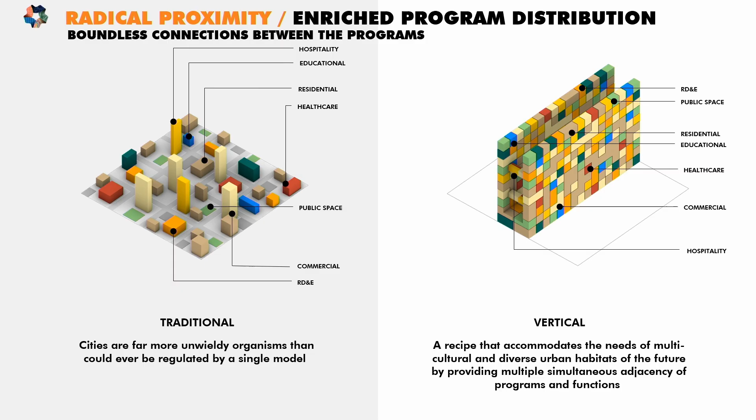And it just has to do with the idea that if you're in a regular city, your proximity is a 2D horizontal X and Y. But when you're in this theoretical floating vertical urbanism, it's X, Y, Z continuously. Your adjacency diagram in terms of different programmatic use is a lot more rich and varied, one could argue, right? So this is kind of like where we are.

As of the last couple of years, my team's been mandated to kind of work on this. For a lot of reasons that you can imagine, I cannot tell you more details. Suffice to say that this project is going through with a lot of other teams, and we'll see what happens. So I'm showing you this because we would not have been able to do this without the UCLA Wilshire exercise.

I'm sure you come across in social media a lot of musicians or athletes telling you that they were able to perform for those 2 seconds because they had 10,000 hours of practice, right? It's the same thing. We were able to do this not because we were such geniuses in those 3 or 4 months. It's because we had the 2 years of research in an academic setting.

So for me, academic research is critical because for me, that's always a preparation for real work. When the real work comes in, you have to be like a fireman. You have to be ready in 2 minutes to do something. If you don't prep, in that 2 minutes, you're going to die. So this is why I always think the relevancy of academia is really, really critical.

Moving forward, in the same venue, we were tasked by this larger organization to look at food deserts. So again, we started to look at the research, and the global issues on food equity have to do with this. I know the year's a little bit dated, but as the world's population is increasing, the agricultural land is decreasing, and we're having this larger and larger gap, right? So we all know this. We all know this famous metric from the United Nations. By 2050, 80% is going to live in the cities.

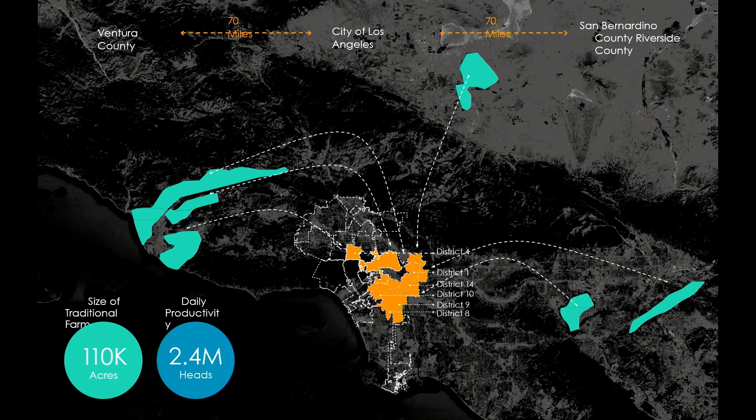So what are the local issues? So local issues are more about health. It's about health. I just told you about the health of the world because of the amount of distribution.

The earth is dying. Well, here in LA, we got adults who are dying because of food inequities. So about 20% are overweight because of access to food, let alone the fact that they're not taking care of themselves. And about 3 times more supermarkets are in different socioeconomic neighborhoods, especially those with a white neighborhood. And so a lot of other politicians will tell you there's no food desert because you have fast food. Fast food is not food, right?

So where can we bring basically a larger form of healthy food? So this is what food desert is, right? It has to do with proximity, price, leakage, quality, choice, quantity, and alternatives. And that's basically the food desert imprint of LA. So we're trying to kind of mitigate the obesity of adults and of childhood.

So out of all the strategies from passive to active, several groups have asked us, not that I believe in this as the only option, but it is one of the many options, which is urban farming, right? So urban farming in terms of a case for hydroponic systems. So hydroponic systems, somewhat divisive, somewhat controversial. The Japanese have been using this quite a bit for them to actually consolidate all their farming within the city.

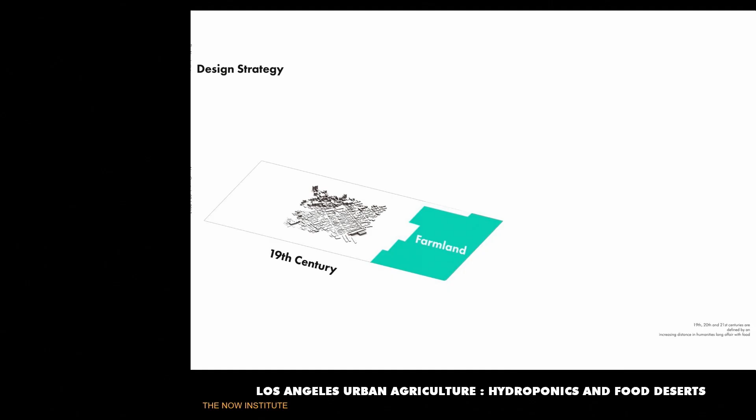So if in the 19th century we had this classic relationship, in the 21st century we have more and more of a distance. And so the argument is, is it possible to kind of fold it and integrate it? And so there's a lot of other indexes, like the very famous diagram from SITE, which talks about whether you can actually have a different ecosystem of urbanism that is layered. And of course, by now, we all know that there's a lot of these urban farms on the rooftops of cities, like in Hong Kong. This is now a Singapore model, and of course, I just showed you the hydroponics.

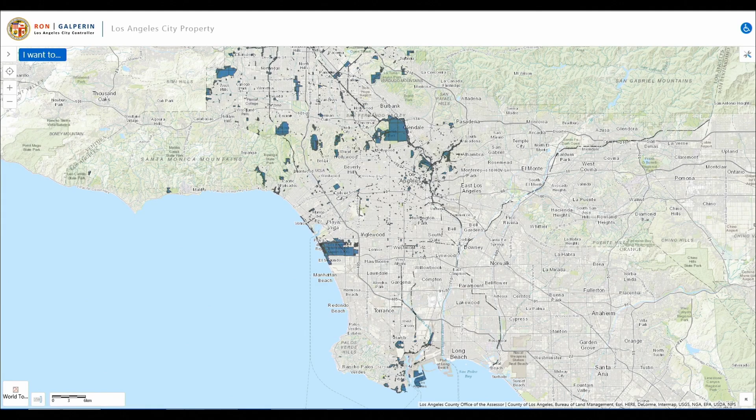So on a research basis now, and working with the city of LA, these are some of the projects that we're doing through the Now Institute. So this was my job. This is actually a map I really love because all the blue color is land that's owned by the city, but it's leftover land. You know, they're strangely shaped, or they're too small, or they're next to other critical areas. So this is downtown LA. So obviously the larger squares are the city hall and the convention center.

But you go to different areas and you see these tiny little blue lines, right? These are tiny little half blocks that no developer will touch. They're like leftover mounds of dirt. So where can we start using this to leverage certain kinds of farming for the population? So we started to look at different kinds of metric projects. So one of the ones that came up was a competition for this park in downtown LA called Pershing Square.

And so we decided that we're actually going to invoke a tower that would showcase urban agriculture, and it would feed into a series of restaurants that could be almost like very high-end Michelin restaurants to elevate the discussion about sustainability, not through guilt, like you have to do it, not through Catholic guilt, but through desire. So, hey, the food and the vegetables and the lettuce is going to taste so much better when you do this.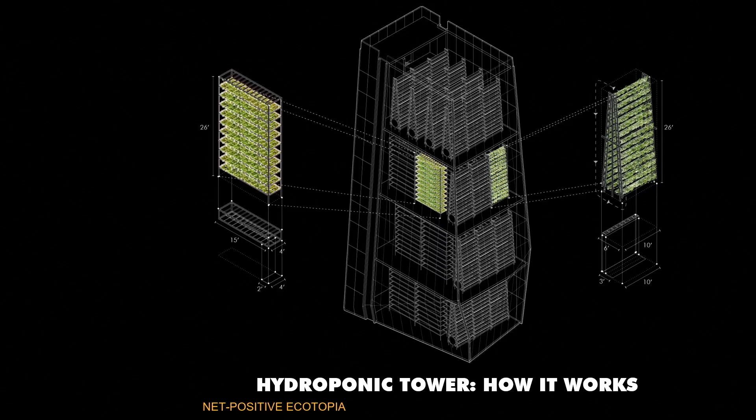Yes, we're feeding it into the Michelin restaurants just to raise the larger cultural bar and to showcase this. And we completed the design of basically this tower. And that one tower is equivalent to 25 acres of farming. The one problem with hydroponics is that it does not do roots.

Root is like potatoes, carrots. Okay, it does not do root, but it does do leaf, herb, and vine. And vine does include, like, eggplants and tomatoes. So we're kind of limited to that, but that's fine. And the same metrics I just showed you, and we started to create this.

This one, we didn't win the competition. We came in second, and it became the talk of the town. The winning prize was a big piece of lawn. It was just a green carpet, so a different idea.

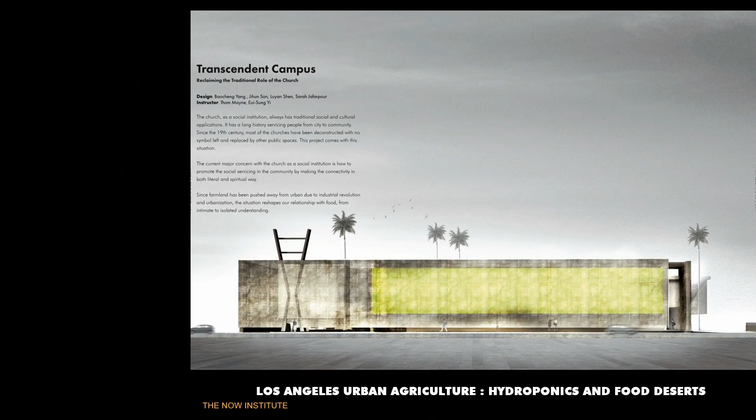We started to talk to churches because right now, I don't know how it is here, but in the United States, being integrated with organized religion is decreasing quite a bit. So there's a decreasing amount of those who are going to churches and other temples. So all the churches are now asking for a different form of community outreach. So in this regard, it has to do now with being agents of food equity.

So this was one board that we were creating to work with this one community group, giving them basically different types of metrics that they would actually use to self-fund these systems. Another one was to work with LAUSD.

So LA Unified School District, it came from the idea that if you taste ketchup when you're a little child, even as an adult, even if you're a really seasoned Michelin chef, your taste bud is deeply ingrained with, let's say, the sugary ketchup taste. But if as a young child your parents gave you good fruit, good vegetables, when you grow older, you will seek healthy food.

It's like, how do you deeply ingrain food culture when you're young? And it begins with elementary school. So we decided to seed elementary schools with these urban farming units, and they would actually be able to touch tomatoes, kind of be competitive whose tomato is growing first or last. And that became a method of seeding all the LAUSD schools up and down in downtown LA.

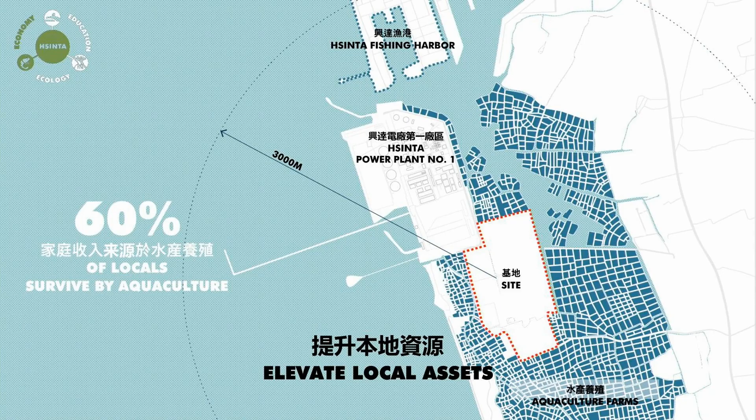This was a site that was given. And I told my team, what is this interesting pattern that's outside of the site? And of course, the answer was, these are abandoned aquaculture farms. It was already there, and it was like a low-hanging fruit. So we decided that we're actually going to revive that and create a whole new integrated ecosystem.

We realized that the water being warmed by the energy plant was the perfect temperature for the shrimp fry, which is another word for shrimp babies, to actually grow and mature. Okay, it was a perfect warm temperature. And the stabilization of the whole area was through the mangroves. And guess what? The shrimp fry, they love mangroves.

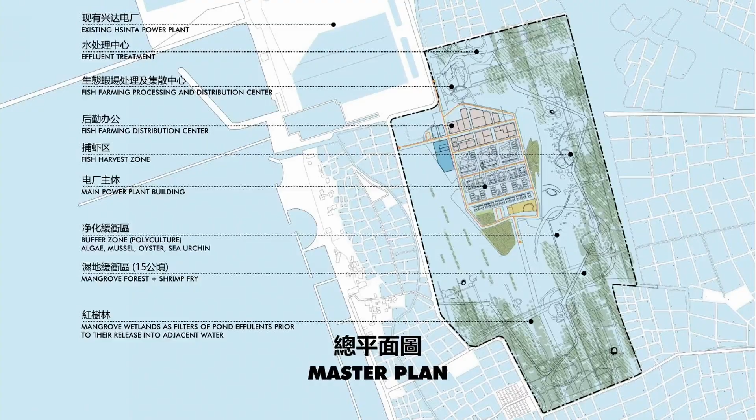So it became this whole landscape ecological revitalization strategy, shrimp business, and the ability to create a larger narrative about the power plant. So we did a complete landscape plus engineering integrated drawing that conjoined a larger ecosystem that even netted a reasonable, modest amount of money. 30 million Taiwanese is not a lot of money. That's like $1 million US, okay? But it is just enough to sustain this as a larger narrative.

This was the model, and we ended up winning this nationwide. This was all open to every professional. And my students and I, we ended up winning this based on the argument. So what I wanted to tell you guys is that research and what we call problem formation, the formation of an argument, goes a long way.

Why? Because it allows politicians, mayors, governors, and presidents to use that argument as part of their public discussion and presentation. So this was basically what the image was. This is what we ended up winning. We ended up distributing all these strategies all over the country.

So I think I'm running out of time, but I had Haiti now. But stop. One more? One more? Okay, last one.

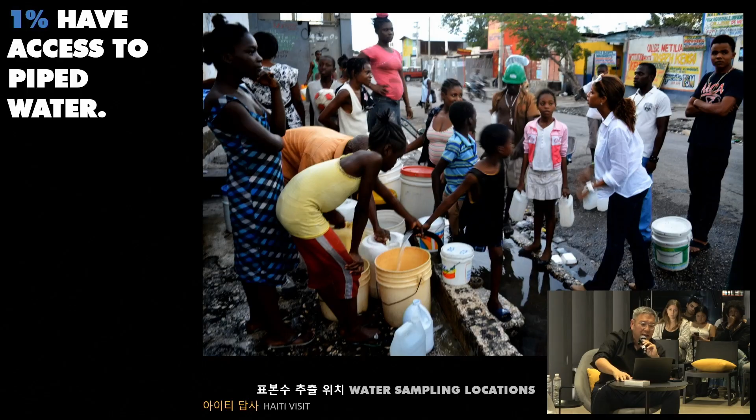And there is an informality to the presence of an ecosystem in terms of lodging and energy. But the problem is, as you can imagine, there's only 26% that has what they call improved sanitation, which is a UN term. All that means is that there's a hole in the ground. Okay. 15% legal electricity, which is even kind of optimistic. About 83% is in what we call informal housing. About 1% has piped water because most of the pipe system is from a Napoleon-era water.

My focus with Michelle Obama was on the children. So at this point now, I would say about 30% were under the age of 18, so can we target them? So I was working with the United Nations, the World Bank, and UNESCO, and they said, Mr. Yi, I would advise you to pivot away from the capital city of Port-au-Prince, which was a total disaster and mess, and I would ask you to go up to Cap-Haïtien, which was the original capital city when this was Napoleon's colony. 50% of the world's coffee and sugar were supplied by Haiti during the French colonial period.

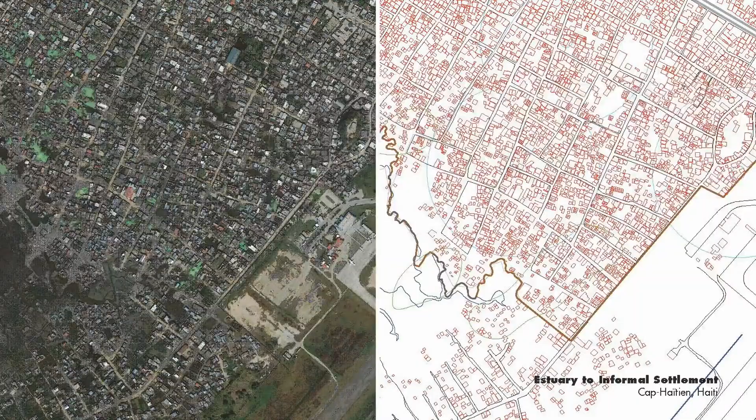They would actually analyze shadows to see how tall buildings are. But because it's so small, you still have to trace everything. So my students ended up retracing Esri satellite maps because Google was not covering Haiti. So we were retracing all this. We're retracing every building. And what became really useful was when you start to look at these buildings at the bottom of the picture, like these on the outliers, these are clearly illegal buildings, right? These became really, really critical because we ended up now making these simple polygons.

And what we ended up doing was that each one of those red blocks was one of these huts on the left-hand side. So I would go up with, let's say, 3 of you. I would march up. They will see this Asian guy, completely alien. I probably look lost. So they are now talking to me. Meanwhile, I have 3 of you go on the side. One of you look past the curtain, count immediately how many beds there are because the bed sheets are white against a dark shadow. 1, 2, 3 beds, and you do a GPS lock.

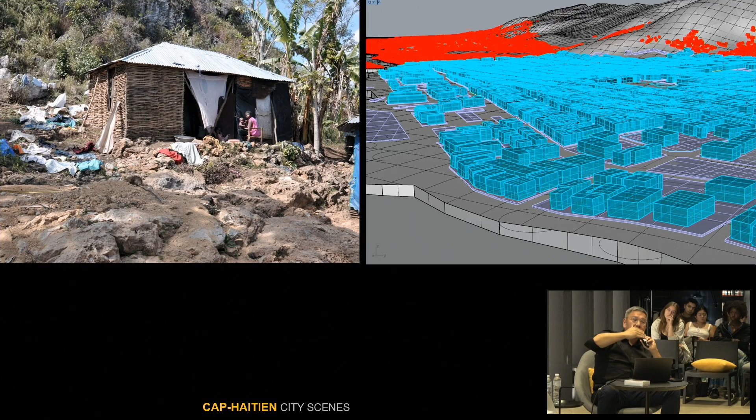Okay? Out of maybe 10 polygons, we could do about 6. So statistically, if I do 6 out of 10, I could basically project through probability what the population is. This is how I did it. And then I'm talking to the mayor. You could see he is completely not convinced that he needs my map, right? And I'm pleading with him. These are all my students. They're just like you. But the urban planner is super happy. He's ecstatic because it's the first time he actually has a true map.

We make multiple copies of this, and we're now distributing it to all the locals. They are now mapping out these wells because the river is so polluted. The number one need of the people was temporary clean water wells, right? And so my Korean guys are testing this thing, but what's the problem? A lot of these rich families ended up hiding these water wells by building walls around them. So no one knows where all the water wells were.

So we had this crazy idea of bringing down from LA 30 soccer balls, footballs, with no air. We brought them in, and we told each one of the children, if you find me 1 well, I'll give you 1 football, right? Greatest human navigation tool. They found all 30 wells. And I say, if somebody finds me the well of that really rich family, I'll give you the pump. Because whoever holds the pump is the king of the neighborhood, right? The pump got me that well. And then we started to map everything out, and it became really important.

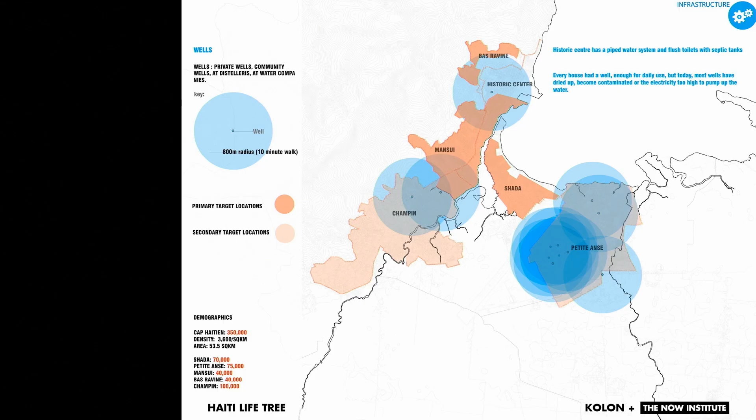Meanwhile, we had another team underneath me. We were trying to understand culture, right? But there's no books. So we realized we had to make our own book about Haiti. This was 700 pages, and it's not about me writing. This is me as an editor saying to all the leadership, to the professors, to the intelligentsia of Haiti, I know you all wanted an outlet. Let me give you an outlet. Each one of you, you write something, and I will put it in a book, and I will sell this on Amazon. So we ended up doing that.

That became successful. And then finally, our third piece to deal with kid safety and education was a one-stop shopping that they call the Life Tree. So we call the Life Tree, where can you go? Toilet, water, energy, and where can it be a safe place? So we had the support of Madame Pierre-Louis. She was the only female prime minister of Haiti. She goes, Professor Yi, I will support you, but I'm going to ask you to do something a little bit crazy. It's like, what is that?

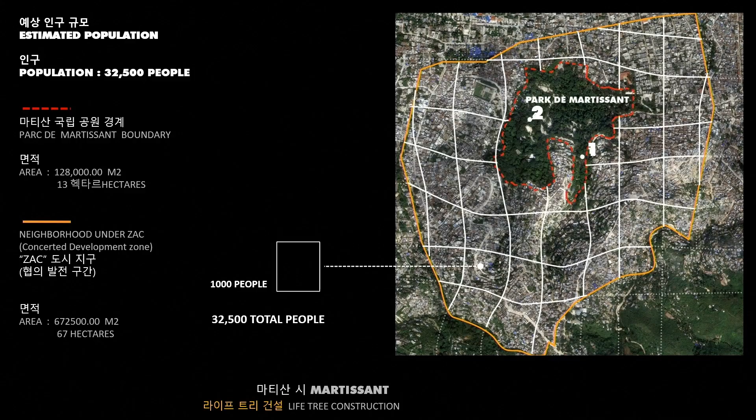I need you to come to this park I have called Parc Martissant. That park is this oasis where only women and children are allowed. No men are allowed. Men are guarding the perimeter with guns because that entire area is run by 3 gangs that are continuously fighting and killing each other. 1 square is 1,000 people. So, Professor Yi, I want you to come in. I'm going to give you 2 sites to put in your special water tank for fresh water.

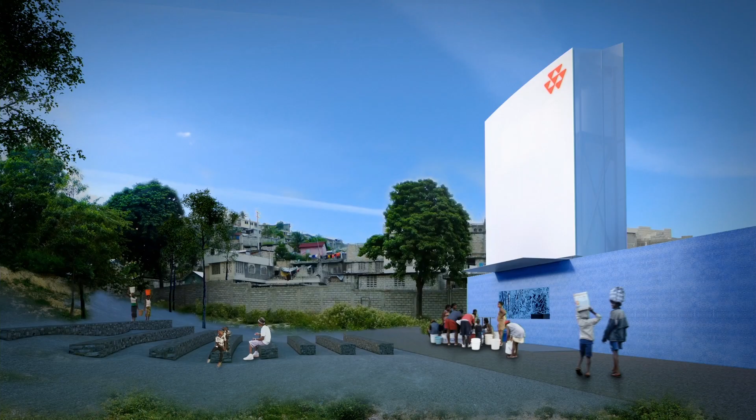And it was just a simple design. It's a 10-meter water tank, really, really old-fashioned. But that logo was this Korean company that was giving me what Seoul uses. The city of Seoul uses this technology to filter all their water for their people.

And I figured if it's good for Korea, it's going to be good here, right? But they needed gravity, 10 meters tall, to push the water through this membrane filter, and that's where the 10-meter height came in. We're building this thing, so why don't we just make it into this collective entertainment education area?

The problem is this: when the children are in their houses behind, in the middle of the night, it's so hot they have to go outside. There's no electricity, so they cannot study. Candlelight is not going to be enough, and once they come out, guess what happens? They get kidnapped, and they get picked up by the gangs. So this is a place where we wanted them to come in, and we ended up building this 10-meter tank.

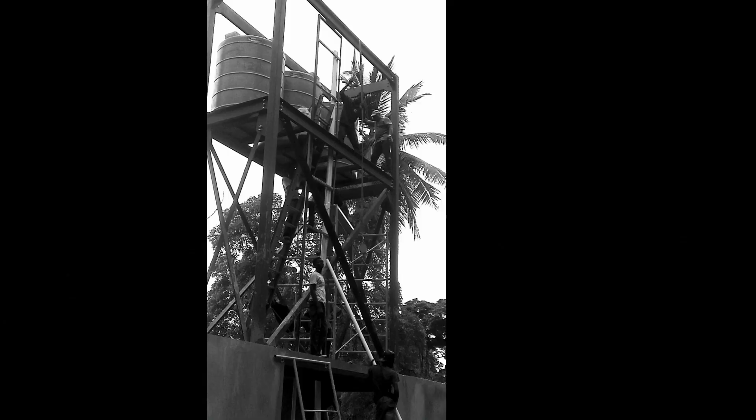The building next door was this dilapidated building. We rebuilt that. We made that into a music school. And this is an interesting picture because on the left-hand side is where the gangs are, right? In here was the oasis for the children. And the whole idea was that at least we were able to pilot test like 2 lights that would actually always try to be blue.

And of course, this part is a rendering. But the idea is that you will always have these 2, and that wherever you go, wherever you see the blue light, this is where you could go for safety and clean water. So I'll stop here. Thank you.

Okay, well, thank you very much, both of you. That was really very different, in some ways very different talks, but also a really common theme running through both of them. I think it's this extraordinary kind of research that goes into the projects and the kind of diagramming that's involved. So I thought it was really interesting. That's why I wanted you to show the final project.

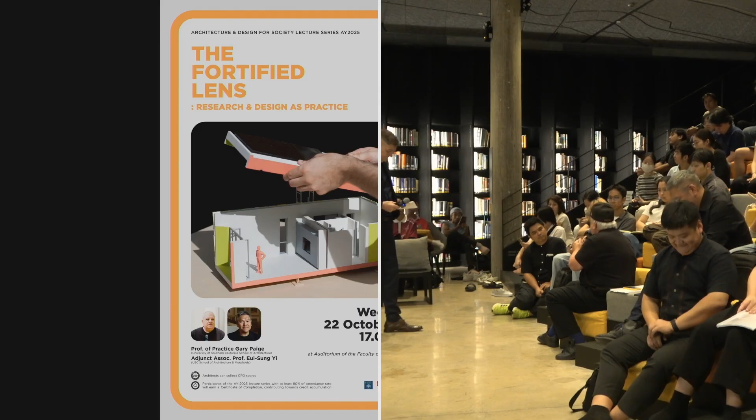So a lot of the research we've been doing is in micro dwellings. How do you design a house of 500 or 350 square feet that could work for an intergenerational family, or has the flexibility to work for roommates or nuclear families or different living scenarios? I think that is also really important, rather than just what we see: trailers that are bridge housing or transitional housing, tents and so forth, none of which really reflect, I think, much research or innovation in architectural terms.

Great, thank you. Any more questions, please? One here. And just pass that back. There's one already, I think. You got it? Thank you.

I want to ask a question for Professor Yi. You showed in the lecture that research is very important for architectural development. So I want to ask, how do you scope and plan the research when you need some information? Thank you.

Yeah, that's a good question, and I think it's the basis for this whole lecture. Like when you go and see a doctor, the doctor gives you a big medical check, and they say, oh, you have a cold, so you could take a little medicine, or you need to lose weight, so just go back home and eat better food, right? There is a larger assessment of the city where we are trying to locate solutions that are first within the community and culture. I don't like the idea of an external solution coming in artificially.